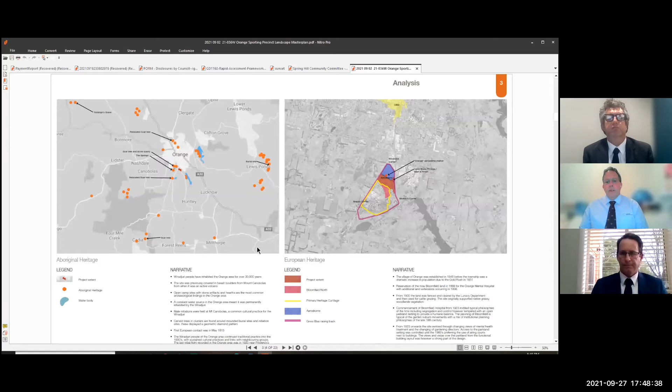So in developing the plan, which is public now, we ran through all the history about where it's located. We've also acknowledged the Aboriginal heritage and the European heritage of the site, so that's included in the plan. We've looked at how it connects with the city and all the different access points.

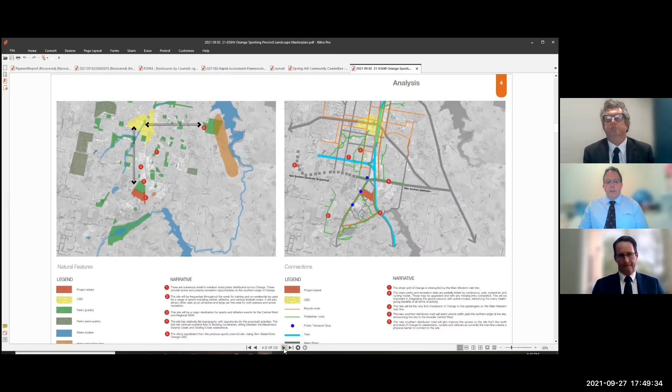So that will increase the access points and egress points to the site. You can see there's going to be multiple north-south connections and east-west connections to the site. So as I said, whilst we know that will happen, because it doesn't exist at the moment, it's not included in the traffic plan.

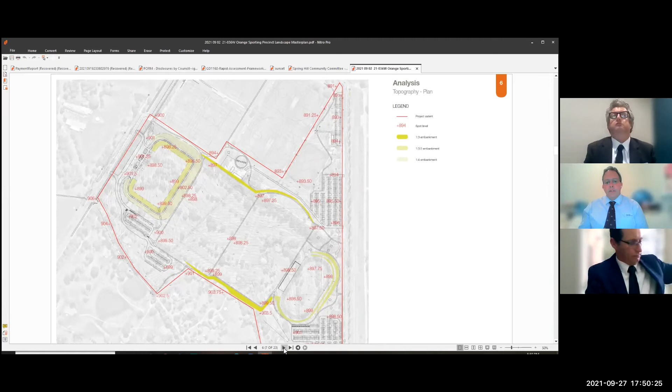We've also dealt with some visual connections of the site, and what we did was include some topography. Anyone who's been out there knows how the site changes from its high point near the entrance down to the lower point where the existing fields are. Why that's important is because when we're developing our civil design, we need to do cut and fill - cutting from the high point and filling at the low point to get a level playing surface. The impact is the ground changes, and we balance that across the site, but it makes it hard to retain vegetation that sits within that cut and fill.

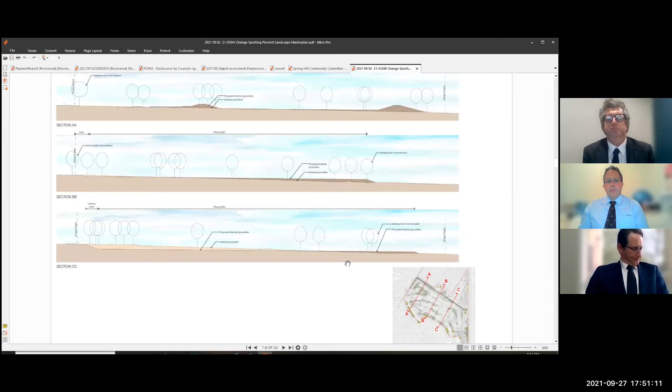Within the plan there's an indication of the change in topography showing cut and fill. Particularly down these areas, you can see with the cut these trees are above the ground - they'd be in midair if left in place, so obviously you can't. Similarly on the fill side, they'd go far above the base of the existing trees. That gives you an indication of how we have to manage it across the site, which limits what we can do. Top to bottom is how you read that plan, A, B and C across the page.

We've provided some extra indications of how it sits within the precinct. You can see there's quite a bit of cut this end, and then we level out down here - that's in this zone across there.

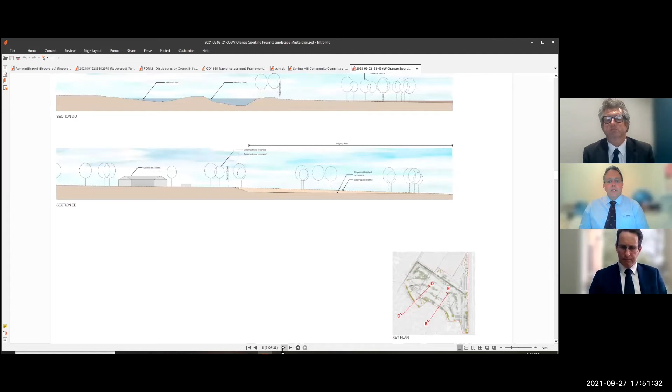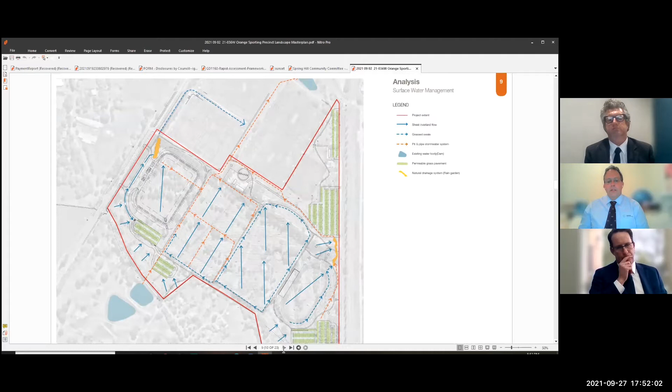We dealt with water surface management - the blue lines are surface water, the orange lines are pit and pipe, showing how we drain and recycle. We'll recycle using the existing water up here, and the overflow from the hospital down south through these ponds will be underground, then picked up in that network. There's quite a bit of detail in the civil designs to deal with that - just an indication of how that will work on the site.

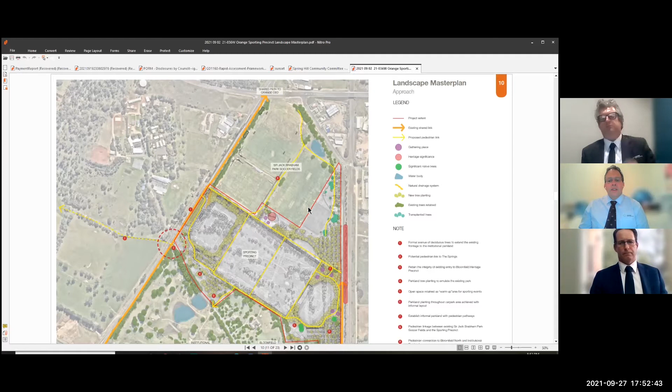The layout hasn't changed - we still have the main stadium on the western side and the athletics on the eastern side with the multi-purpose fields in the middle. What has changed a little is how we deal with ingress and egress as that design's developed, with a two-way in and out then back to town or heading south. This also affords us an opportunity to do something in front of the proposed stadium, and all that detail is included.

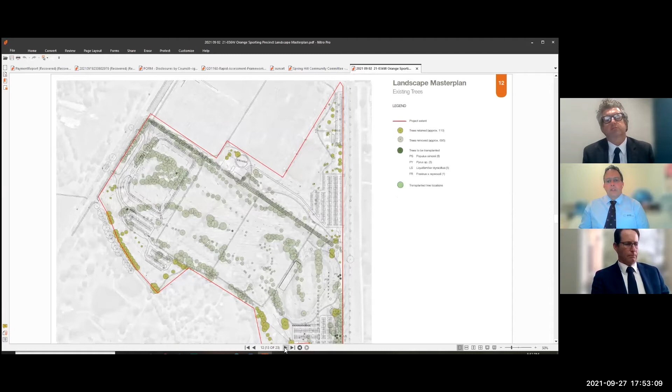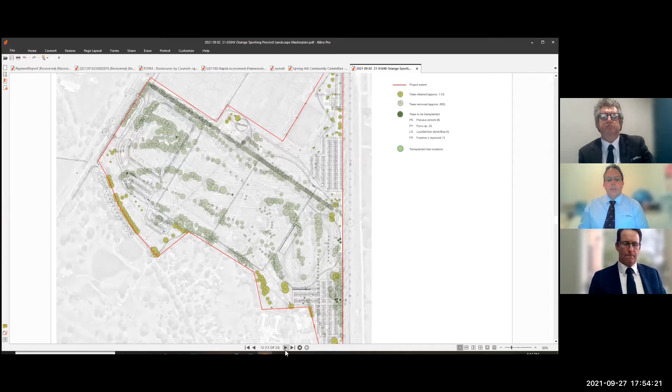This shows the existing trees and what we're proposing to remove. The trees in lighter green are the ones we'll keep, these ones down the middle will be transplanted, these ones will be protected, and these ones will be moved within the next week or so. The trees within the footprints of the two stadiums are the ones we've already taken out. We're also including now the trees along Forest Road and some along Huntley Road - fundamentally because they're pine trees, not terrific specimens, and they'll need a replacement strategy in the near future regardless. Part of that strategy is to build on some of the native trees that existed in this zone beforehand, but also bring in some exotic trees so that brings colour into the precinct when those trees lose their leaves in the winter months.

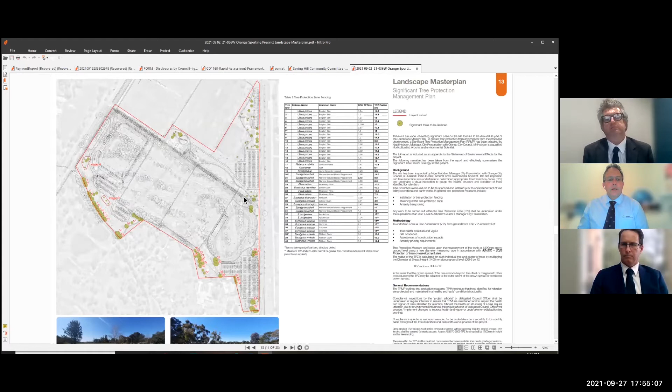The purpose of this diagram is to show the trees being protected and the treatment for those trees - they've all been identified and numbered. This is a summary of the process around managing those trees and how we'll protect them; there's a 20-odd page document that details that, but this is the summary. You can see predominantly they're around the borders, and the reason is, as I said, with the change in the slope there's very little opportunity to keep the trees through the proposed development area, and obviously along the northern boundary.

Pretty sure the next one shows you.

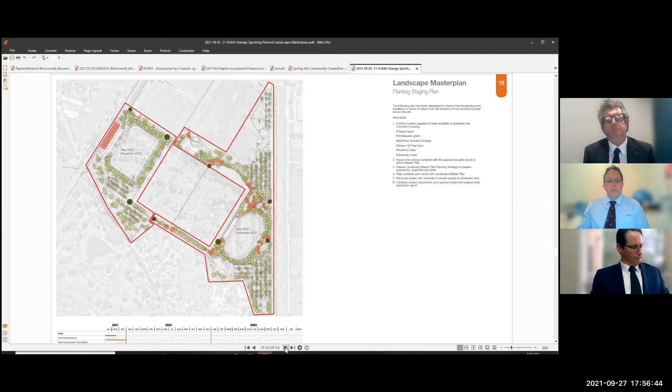So that's just how we plan on planting and staging, and what we can do when we have to procure trees. Our biggest limiter will be the availability of trees and growing that stock on. This is a plan designed to ensure that we can acquire the required trees when we need to, and then we can plant them as we work through the development.

This one's important for showing the pedestrian links, not only on the proposed site, but also through to the existing site, and how they will work. They've all been designed around accessible traversing of the site. Whilst these paths are on top of batters or run along the bottoms of batters or around, they all meet the requirements for accessibility.

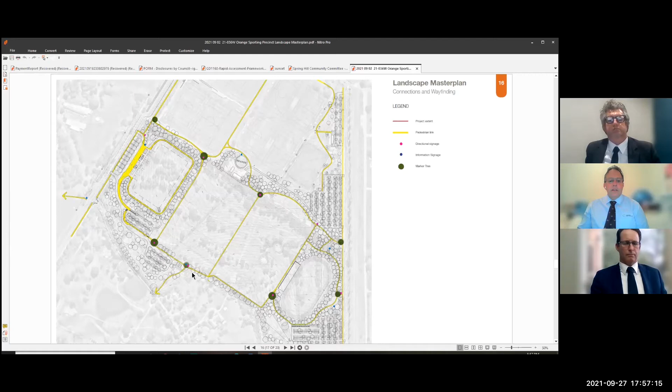This is a pathway that links through to existing, and you can see here where we'll pick up different access points. So if you were to use this site other than attending a sporting event, you could park in any of these car parks, pick up these trails, go for a walk around the precinct, incorporate it in a loop, do whatever you do, and also access the southern 9 holes of the golf course.

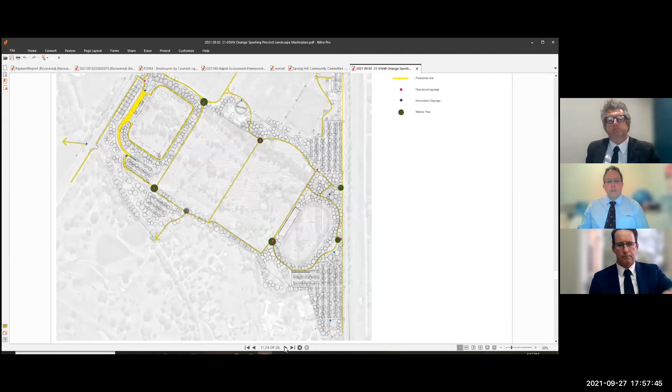This just gives us a start to get into the detail about how it looks, with some more imagery around that. Again, all these different points on the diagram are all picked up in here, showing what they are and what we're trying to achieve and how we're trying to achieve that.

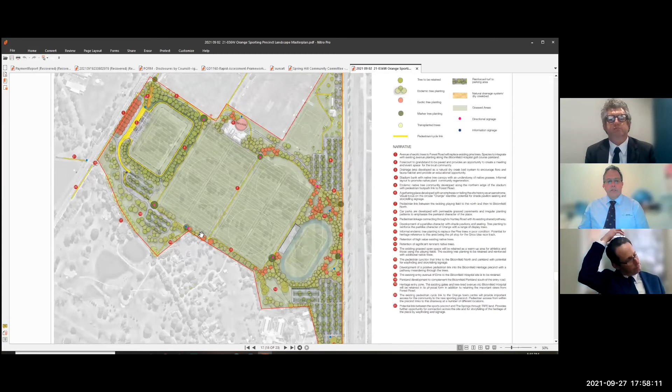So that's a fairly straightforward process. If you see a number 7, it links to number 7 over here, obviously, so people can work their way through that.

We get into some zoom shots. This obviously is the main stadium. This is the treatment that we're proposing along Forest Road. Again, these are exotic trees, a double laneway in and out, a nice access point parking zone area here for the buses, etc. This yellow part here is a concourse out in front of the stadium itself, and then obviously access to the stadium.

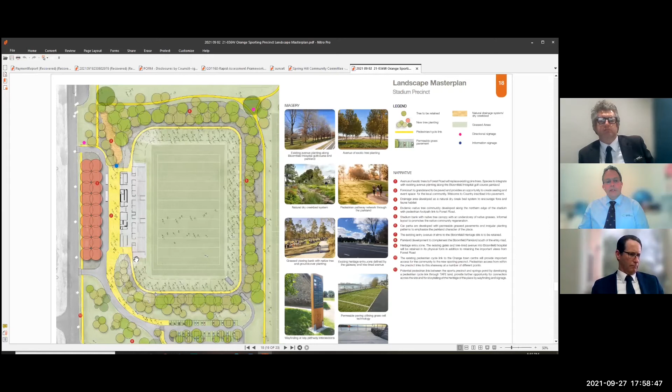Similarly, there's some sections, same as we did before. The top one is across the field, so that's how it would look from Forest Road across. You can see it's quite low profile at street level. What you see, you've got the 2 rows of deciduous trees, and then you pick up the grandstand, so it's quite well sheltered.

And then again, this is a cross section from that car there, on that existing access road through the Heritage Gate. So again, there's a fair bit of greenery trees, etc., sympathetic treatment to shelter the visual impact of the development.

Planting of trees within the car parks, and also using a product that allows us to green the car park itself, so it's not a black bitumen, is something that we've also included in this document.

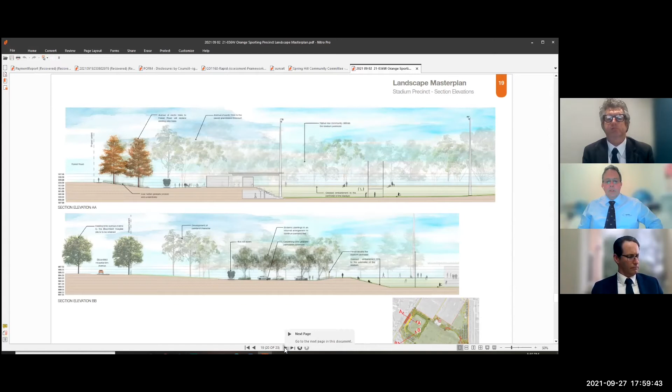This one again is the athletics precinct. Obviously you can see the car parking, and some of that detail I was talking about with the greening of the parking bays. Those are accessible car parks along there.

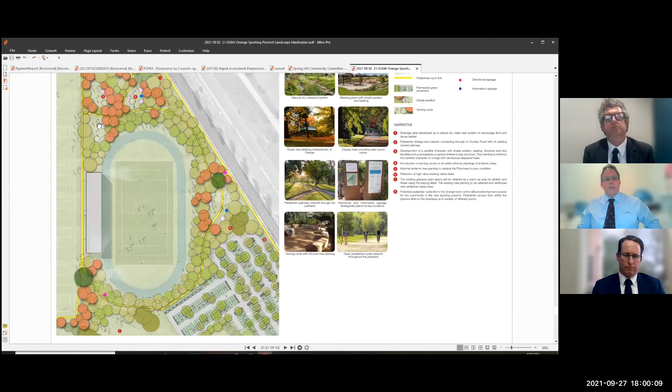You've got pathways, meeting points, and informal play areas considered in there. Those dots are humans to scale, so you can get a feel for what the scale is, and then obviously it connects through to the rest of the precinct, and also to Bloomfield itself.

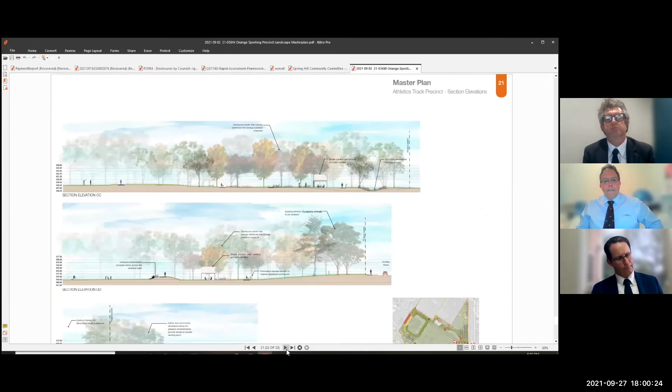Again, some cross sections, so you can see how it'll look. This one here is across the northern end of the proposal, so a natural waterway, that's a meeting point. Looking from left to right, that's how it looks. The trees are quite high once they grow, and then you've got the understory and places that people can recreate outside of the sporting precinct itself.

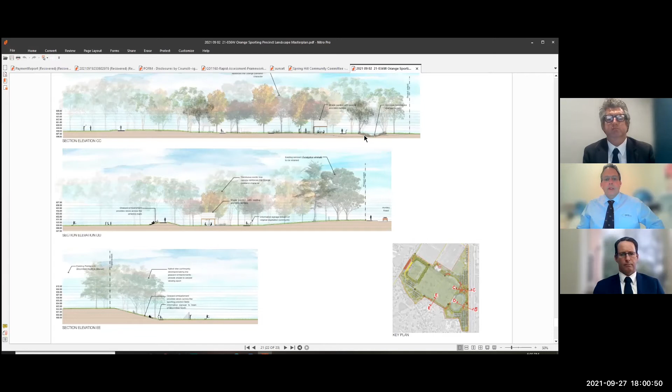Details on planting strategy, principles, etc., proposed plans, how they all work. A lot of these were picked up from studies that we'd done within the precinct. Certainly some of them even go back to when we looked at Gosling Creek and replanting that precinct, when that work was done to remove predominantly the pine plantation down there and replace those trees to create that environment. The different sources and reference points are in there. They're published documents, but if anyone wants those, we can provide them.

Again, it shows what we're proposing. So that's the main element that we have been working on since the last proposal. We haven't developed the grandstand anymore, other than to have some further meetings with state bodies and federal bodies, sporting groups, and the same with the athletics precinct. So we're just refining the inputs into those design elements. That's all I wanted to say at this point.

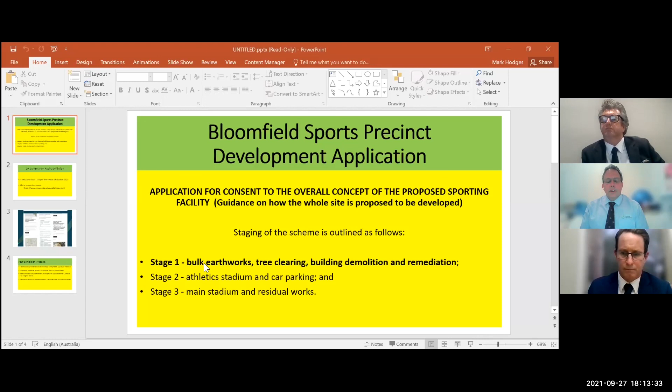Last one from me: could we have an overall indication of the stages to final commissioning and use? I can give you the development stages. The stages we're proposing are the civil works, which will also include some of that piping underground preliminary work, creating the pads for the development. We'd at the same time run two tenders for the athletic stadium and the main stadium. Part of that work will incorporate finalising those designs and then submission of those DAs for approval. Then, if those approvals come through, those works would commence — bulk earthworks first, then you'll see those eight multi-purpose fields in the middle start to take form, then the athletics and then the main stadium. But I'd imagine both athletics and the main stadium will be constructed at the same time.

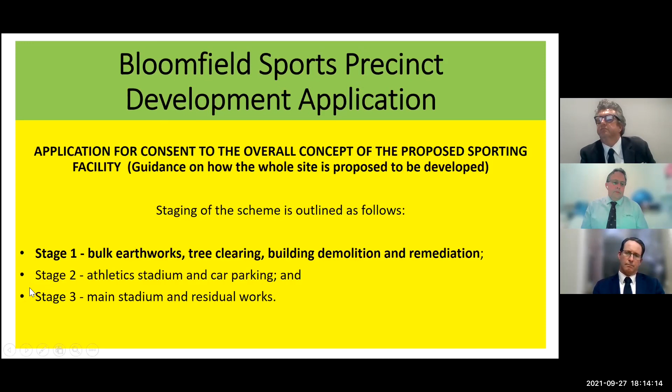This might have been one that came from Lee, but this is from Kate Hook. So just to confirm, if costs aren't finalised, we don't actually know that the project is feasible. We could be completely changing the land without being sure the project is deliverable for 25 million. We're pretty comfortable with our initial costings for the program and the project. Obviously, we develop our tenders within the scope of the funding that's available, so I'm pretty comfortable with the costings.

One from Neil Jones: under COVID restrictions, how many people can attend the on-site meeting? When we've got a date, we'll work out those details, but obviously whatever we do out there will have to meet the COVID restrictions, so we'll comply with what we have to. I don't have the number in front of me, but we'll sort that out when we get a date. I wouldn't have thought it'd be any less than 20 based on current restrictions around outdoor gatherings. I've never had 20 on site when I've been out there with interested parties. Yeah, we'll deal with that.

Any other questions that you might have, Lee? No, that exhausts mine, Nick. I've got another one from Kate Hook: has Crown Land been consulted as to how they would like the land to be used?

Yes, they have — you might be able to go into more detail, Scott. Not really, we've consulted with Crown Lands on that. We're the Crown Land manager for the site. Obviously the project requires a landowner's consent, with the landowner being Crown Land. We've obtained those consents, so prima facie they're happy with what we're proposing — otherwise they wouldn't have provided the landowner's consent for the development.